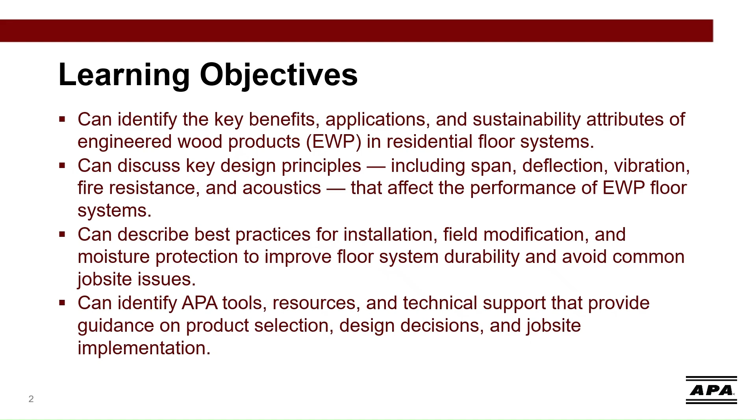All right, enough of the introductions. It's time to dig into our session today. But first, why do we use engineered wood products?

When it comes to floor systems, there are 4 main reasons designers and builders often choose engineered wood.

First, sustainability. These products make efficient use of wood fiber, utilizing a naturally renewable resource and maximizing yield from every log. Second, predictability. They're manufactured to tight tolerances, so performance is consistent and reliable.

Third, performance. Longer spans, flatter floors, and greater design flexibility give builders and design professionals confidence in the finished structure. And finally, waste reduction. Precision manufacturing and design efficiency help minimize job site waste, saving both material and labor as well as disposal costs. Together, these 4 benefits explain why engineered wood continues to be a go-to choice across the industry.

So we know why they're a good choice, but what types of products are we talking about here exactly? Before we get into design principles and best practices, let's quickly cover some product basics for the following list of engineered wood products that are typically used in, but not limited to, floor system design and construction.

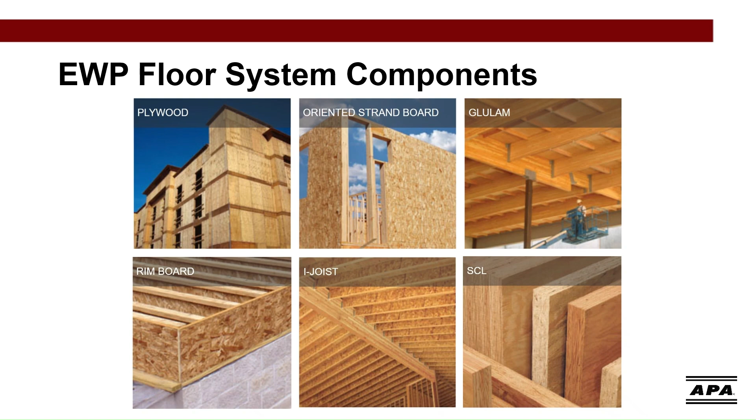We'll begin with structural composite lumber, or SCL. Compared to typical dimension lumber products, these products outperform when either face or edge loaded. The superior performance results from manufacturing processes that align the wood grain, eliminate knots and imperfections, and use dried, layered construction to provide dimensional stability and prevent bowing or twisting. The strength properties of these products are published on a proprietary basis by the individual manufacturer and recognized in their product evaluation reports.

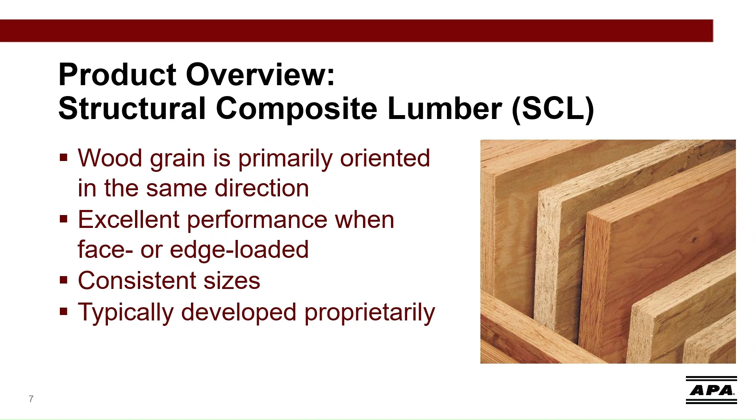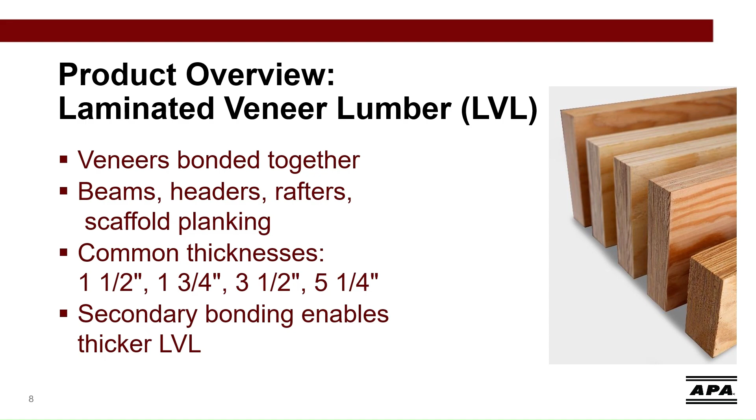The most widely used member of the SCL family is laminated veneer lumber, or LVL. It uses specially selected ultrasonically graded kiln-dried veneers and orients those veneers with the grain running lengthwise. In addition, the veneers are lap joined to create long lengths. LVL is commonly used for beams, headers, rafters, scaffold plank, I-joist flanges, and studs.

Parallel strand lumber, or PSL, is manufactured from veneers that are clipped into long strands and bonded together in a parallel formation. Similar to LVL, the grain runs in the direction of the length of the beam member to maximize bending strength. The strands are cut into lengths around 300 times their thickness, or approximately 1/8 of an inch thick by 1 inch wide, and up to 3 to 4 feet in length. This product is commonly used in headers, beams, and columns, and currently is proprietary to one manufacturer.

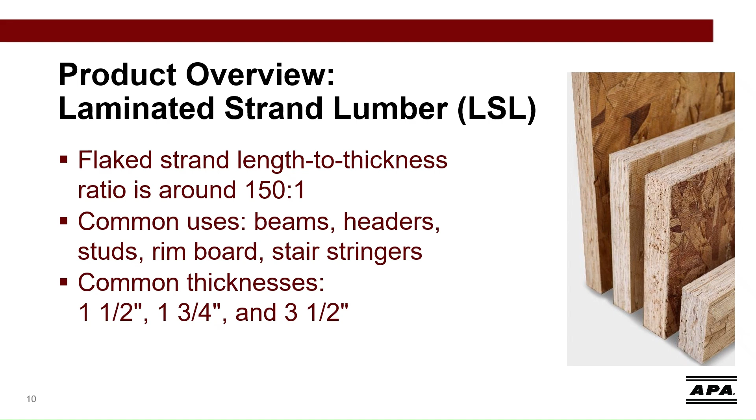LSL, or laminated strand lumber, is another popular member of the SCL family and is used primarily for beams, headers, studs, rim boards, and stair stringers. Unlike PSL, the strands are not cut from veneers. Instead, this product is typically made from smaller diameter trees consisting of a mix of hardwoods like harvested aspen, poplar, and maple, and the logs are stranded instead of planed into veneers. The length to thickness ratio is around 150 to 1, so strands are typically 1/8 of an inch thick by 1 inch wide and up to 12 inches in length.

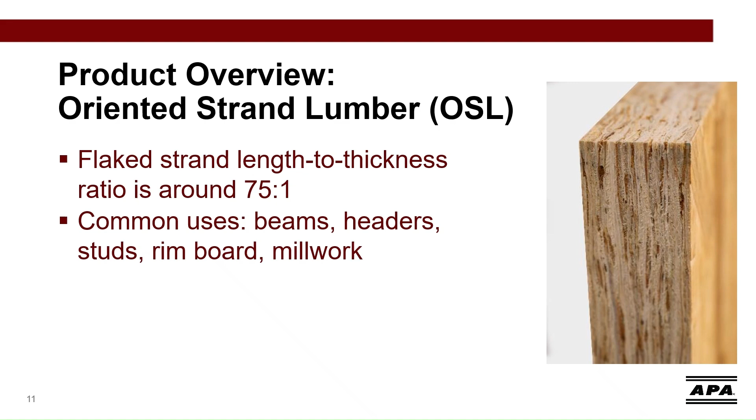And finally, OSL, or oriented strand lumber. It's another member of the SCL family, commonly used for beams, headers, studs, rim board, and millwork. Similar to LSL, the strands are harvested from logs instead of veneers. However, OSL strands are a little smaller than their LSL cousin. The length to thickness ratio is around 75 to 1, so strands are typically 1/8 of an inch thick by 1 inch wide and between 6 to 7 inches in length.

Another popular engineered wood product used in floor systems is glulam. This consists of wood laminations bonded together with the wood grain running parallel to the length of the member. Although they're available in nearly any depth and are only limited in length by manufacturing and transportation restrictions, glulam beams carried by local dealers usually don't exceed around 18 inches in depth.

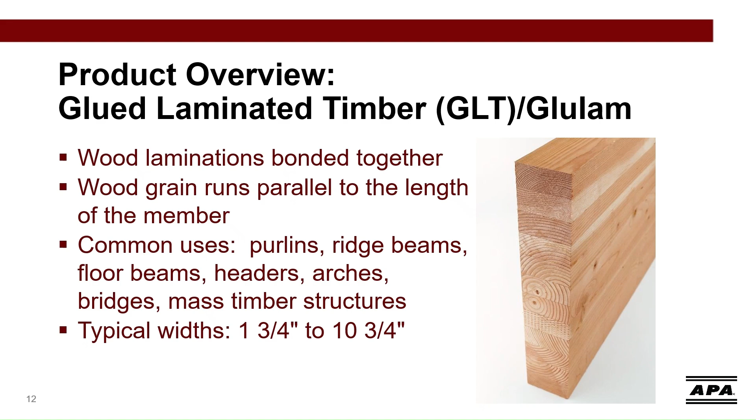These beams are commonly used as roof purlins, ridge beams, floor beams, headers, and columns. The typical width of a glulam can range from 1 3/4 inches to 10 3/4 inches, and they're commonly manufactured from southern pine or Douglas fir.

Let's look at SCL, glulam, and select structural lumber and compare the strength properties that control beam design, such as the allowable bending stress and the modulus of elasticity, which relates to the stiffness of the material or the ability to resist deflection. Looking at this table, we can group these materials into 3 categories based on their stiffness: low, mid, and high.

Note that both LVL and glulam offer products that fit into all categories, where LSL and dimension lumber fall within the low to medium strength range. In addition to LVL and glulam, PSL may also be produced with properties that fall within the high strength range.

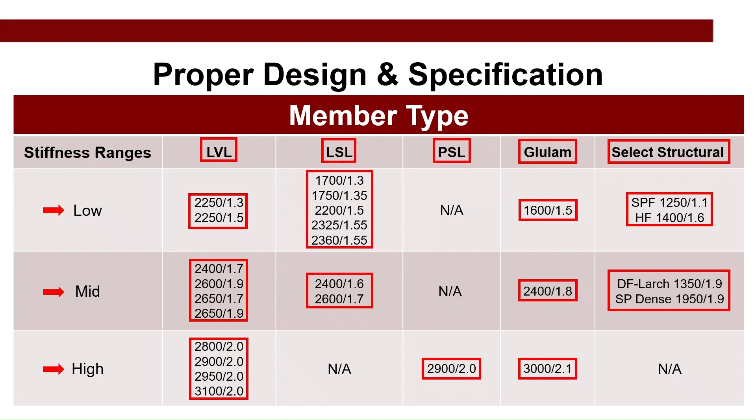When it comes to sizing the member, each individual manufacturer of SCL will have specifier guides, which include load tables for their products based on design properties published in product evaluation reports. These are typically located on the manufacturer website. For Glulam members, you may also reference our S475 design guide, which contains design tables for roof and floor applications.

With these tables, both a live and total load, including dead load, PLF, would be determined based on a tributary width, which could include multiple floors and partition loads if appropriate. The designer can then select an appropriate beam by looking up the span to determine which beam works best for the live and total load PLF, determined using the appropriate load duration factors, whether the beam is in a floor or roof application.

Additionally, Glulam and SCL beams can be sized using manufacturer or third-party software. There are many third-party software available, and a sampling of those is shown here. A list of standard Glulam layups with their associated design values are typically provided for selection directly in the software. For SCL, you may need to manually enter the design values for the intended product, or be very careful about the product you're specifying.

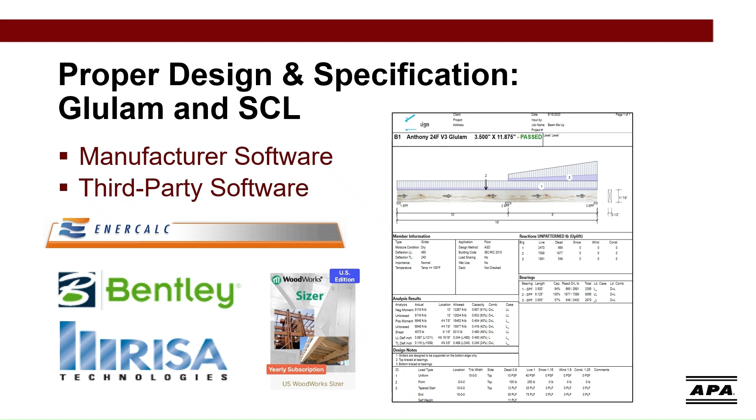Additional considerations for designers include product availability, available software or literature tools that is designed, affordability, as well as whether the members are proprietary or non-proprietary.

Proprietary products typically have specific design values and limitations unique to the manufacturer. Because of this, it may require design time when a substitution is requested, and reference code reports will need to be updated with code changes. Examples of proprietary products include LVL, LSL, OSL, and PSL.

Non-proprietary products are manufactured to meet standardized design values provided in a performance standard and code reference design guides. This means that the contractor may choose from a variety of available manufacturer products that meet the reference product standard and strength. Examples of non-proprietary products are dimension lumber and Glulam beams.

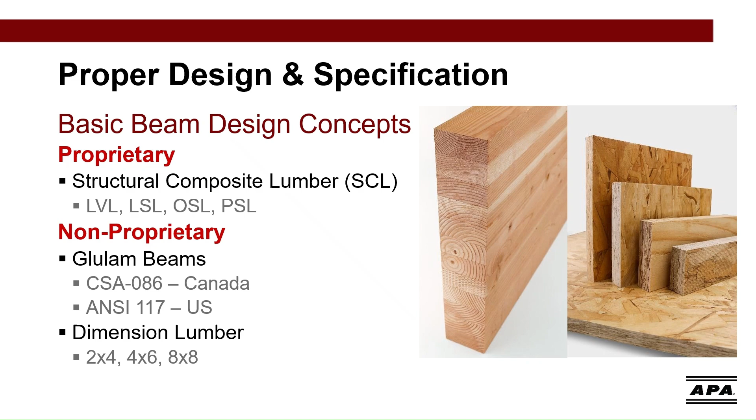I-joists are manufactured in 5 standard depths, including 9.5, 11 7/8, 14, 16, and 18 inches. Similar to SCL products, I-joists are proprietary, so design values and limitations must be obtained from their respective manufacturer. Different manufacturers may utilize different flange materials of various widths and thicknesses. Each manufacturer typically has their own proprietary series numbers that indicate relative capacity of the I-joist. Typically, for a given I-joist depth, higher series numbers indicate larger capacities achieved through larger flanges.

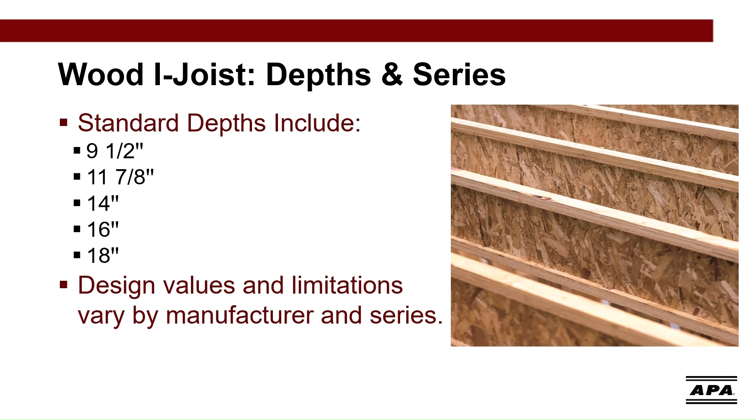They are also based on a set of specific parameters outlined in the table footnotes. These include, but are not limited to, live and dead loading that's being assumed, live and total load deflection criteria, floor sheathing performance category and span rating, ceiling or no ceiling, etc. And these may vary from table to table and for each individual manufacturer.

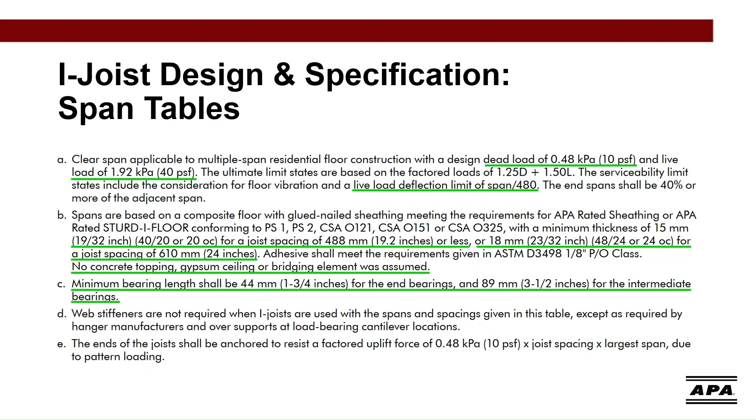Remember that span tables are more conservative than design software, so in some cases, the software may pass a member that appears to fail in the span tables. If an I-joist is specified in an application that meets the design criteria outlined in the span table footnotes and the specified span, it does not require an engineer seal. A seal is only required for point-loaded I-joists or if any of the design parameters are different from those specified in the manufacturer's span table.

Floor layouts produced in design software allow design professionals to change these parameters to suit the specific project needs. There should be a layout for each floor and/or roof, and the design properties should be outlined for each. Additional loading for stairs, tiled areas, kitchen islands, etc. should also be included for each level. Material lists should also be provided for each level, including a hanger list, which will usually specify the fasteners required.

Let's shift our focus to wood structural panels, including OSB and plywood, which are manufactured using wood strands for OSB or veneers for plywood. For plywood panels, the outer veneers are referred to as the face or back plies. The inner plies can be referred to as the core or cross band plies or center ply. The orientation of the strength axis or grain is very important in the fabrication of plywood to ensure dimensional stability and structural properties. The direction of the grain is oriented in perpendicular directions as the panel is laid up.

All of the veneers are bonded together with a waterproof adhesive under heat and pressure. This creates a panel where the veneers work together to form an integral unit. As with plywood, OSB is manufactured with layers with the grain of the strands running in perpendicular orientation to the adjacent layer to ensure dimensional stability and optimal structural properties. OSB is commonly produced in 3 or 4 layers depending on the manufacturing process used at each mill.

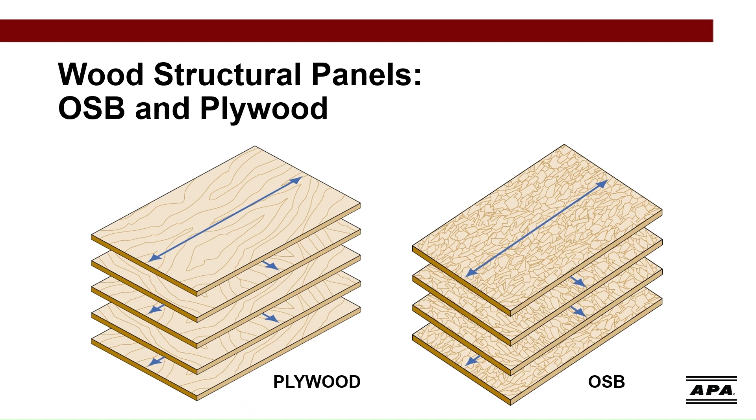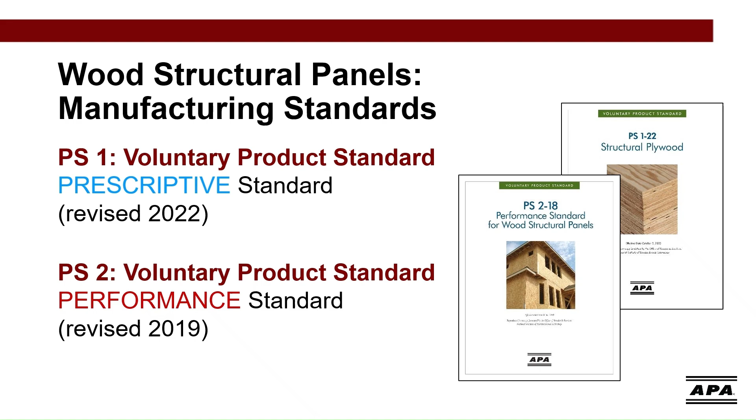U.S. building codes require that structural panels for applications in the U.S. comply with either PS1 or PS2 voluntary product standards developed under procedures published by the U.S. Department of Commerce. PS1 establishes requirements for structural plywood and is primarily prescriptive. PS2 establishes requirements for structural wood-based panels, which include oriented strand board and plywood, and is a performance-based standard.

Wood structural panels for use in Canada must meet the following standards: CSA O121 for Douglas fir plywood, O151 for Canadian softwood plywood, O153 for poplar plywood, and O325 for construction sheathing, which includes oriented strand board.

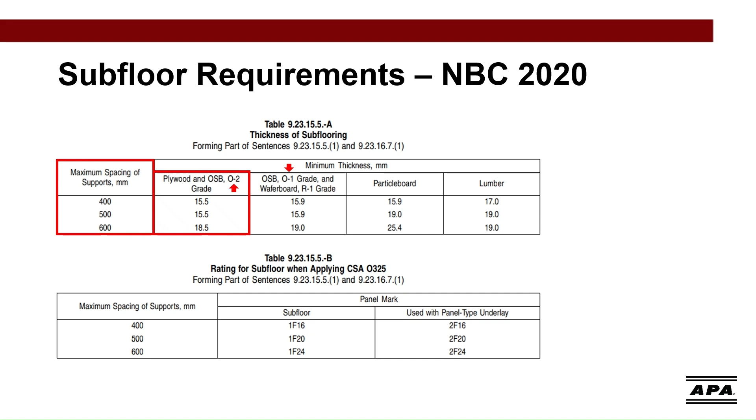And subfloor panels manufactured to meet CSA O325 must conform to Table 9.23.15.5B, as shown here.

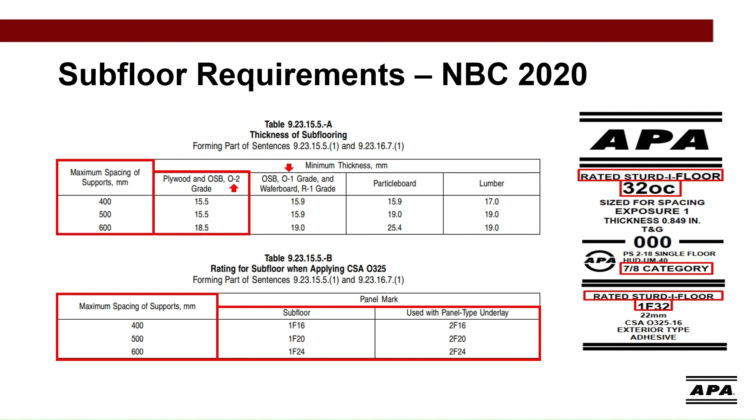The most common APA-rated subfloor trademarks can be seen here, starting off with a 19/32 or 5/8 category subfloor panel. Then we have a 23/32 or 3/4 category, and finally 7/8 category.

In the US, roof and subfloor sheathing requirements can be found in Table R503.2.1.1 as shown here.

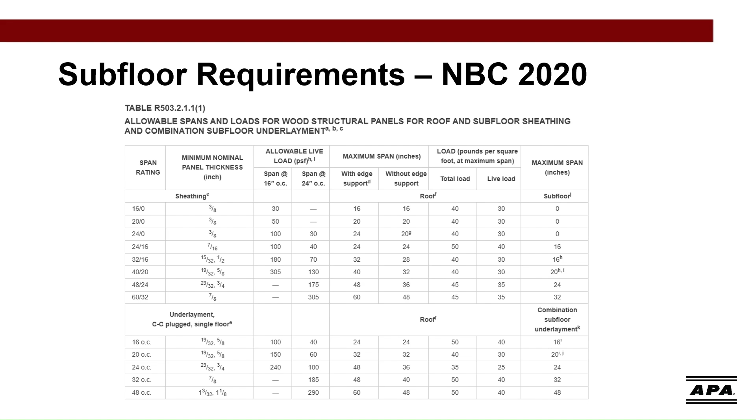All right, let's dig into some design tips and best practices. First step to a quality performing floor is to account for variables that will impact floor system performance.

This includes the type of finished floor product being used. Is it hardwood, ceramic, marble, LVT? The use of ceramic and marble flooring will require additional loading where installed, and each will have specific guidelines and requirements regarding deflection of the floor system and smoothness of the subfloor deck.

What about kitchen islands, countertops, stone-clad fireplaces, and freestanding tubs, along with any mechanical rooms or special use areas? Many designers will use an additional 50 PSF dead load in these areas or align with manufacturer specifications.

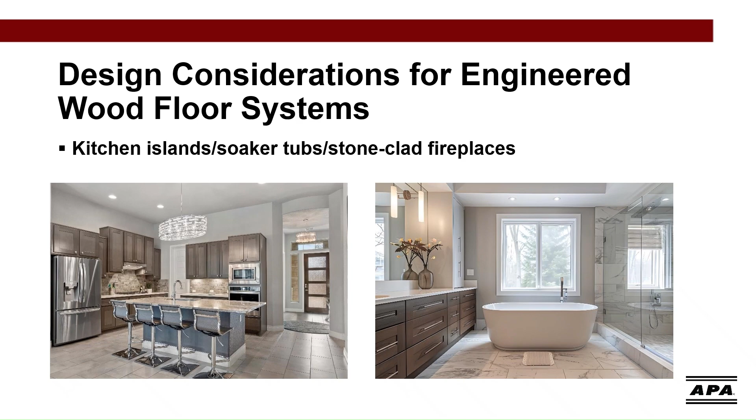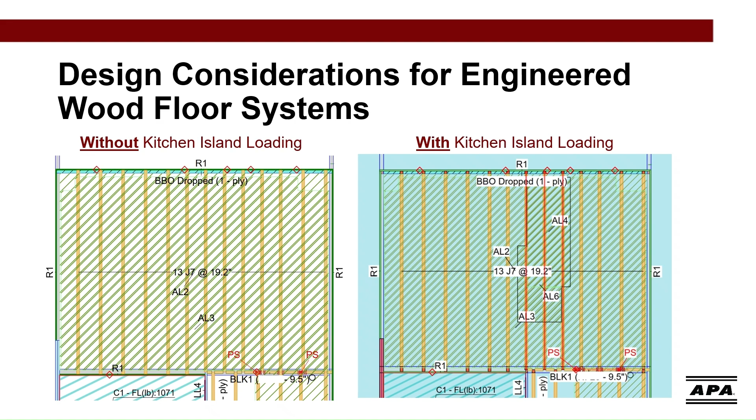Here's an example where the joists work just fine. However, when the kitchen island load is added, the I-joists supporting it fail. This is a perfect example of a floor that will likely experience unwanted deflection and vibration that may lead to cracked tiles in the kitchen area over time.

When designed with the proper loading condition, the floor looks like this, where the joists supporting the kitchen island have been increased to a higher series, capable of handling the additional load. If sticking to the same series is preferred, other options include tightening up the joist on center spacing or doubling the joists in this area.

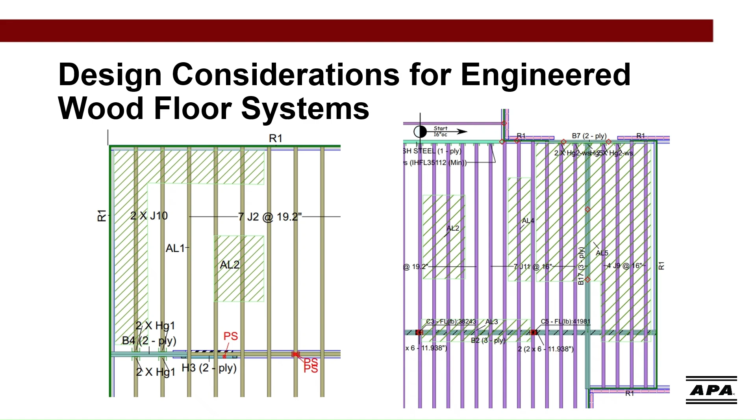Another often overlooked vulnerability is kitchen countertop spaces that run parallel to long spanning joists, as shown here in these examples. So it's not just the kitchen islands, but these other areas. They have ovens, fridges, microwaves. They've got the cabinets and all the dishes and other heavy content inside them. A lot of these countertop areas have granite or quartz on top as well. Design professionals that provide additional loads in these areas can help alleviate floor performance related issues in the future.

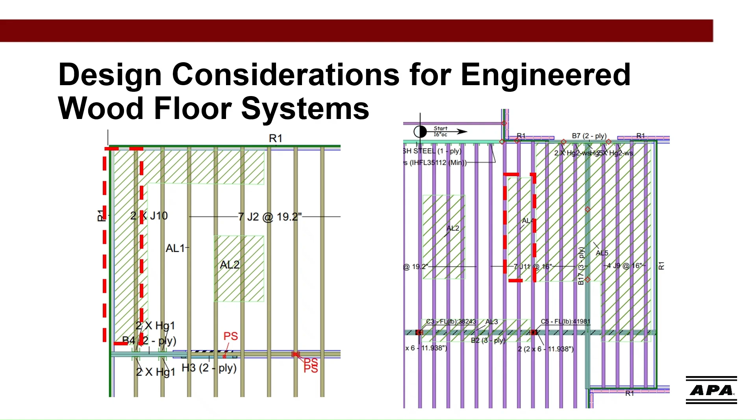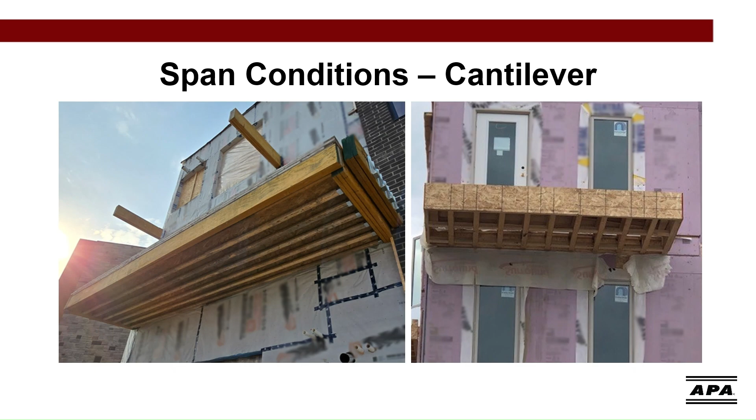Here's an example of a cantilever span condition where the joist or beam cantilevers out over the second support. In this case, the cantilevered members are supporting exterior balconies, but they're often also used to support building offsets. This is what the detail looks like in plan view. Full depth blocking between each cantilevered joist along the support nearest the cantilevered section is critical, as shown here.

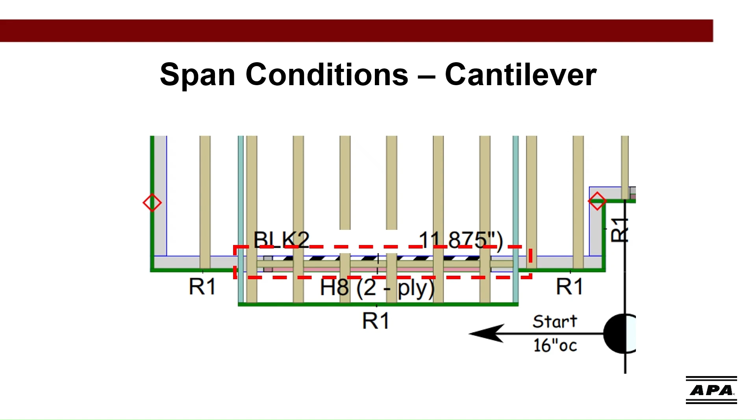When the designer uses a cantilever, as shown here, the hangers along the stair header can be removed, and a simple I-joist to rim board connection detail is used. Blocking is required between the I-joist along the support nearest the cantilever.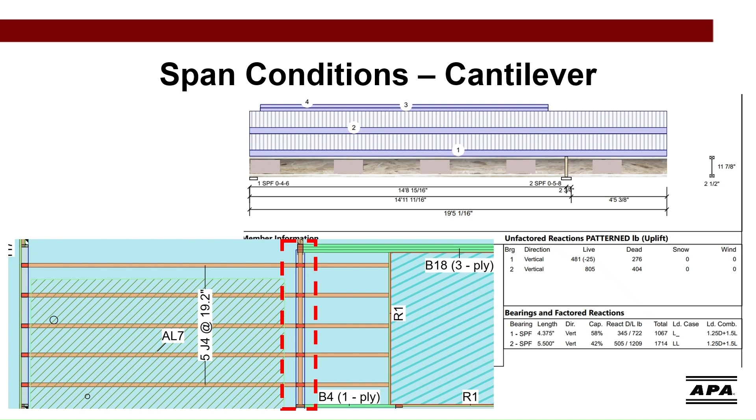APA recommends keeping the cantilevered I-joist portion 1/4 of the back span or 4 feet, whichever is less. While APA details can be used for all I-joist products, most manufacturers have additional details specific to their products. For instance, some allow for a cantilever up to 1/3 the back span. We have many generic cantilever details that can be found in our Z725 publication for those interested.

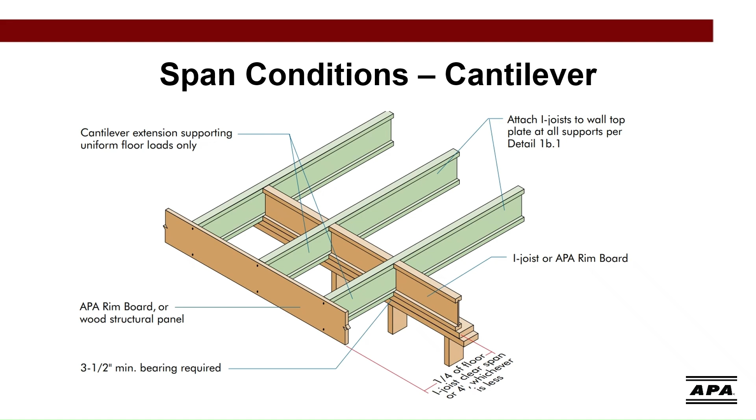So what's better, a simple span or a continuous span? Well, from a performance perspective, a continuously spanning joist will feel stiffer and in many cases span further.

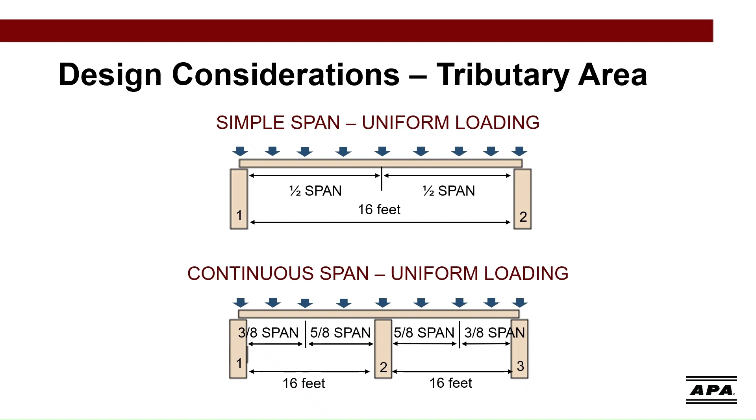One important consideration for span conditions is load distribution. In a simple span condition, half of the uniform load is distributed to one support and half to the other. Pretty simple. Now for continuous spans, the uniform load is distributed a little bit differently as shown here. The middle support ends up taking just a little bit more than half of the load from either span. This also means the continuous member will experience a slightly higher shear stress than the simple span members, but that's not typically the limiting capacity for longer spans.

Here we see an example of a floor over a garage designed two separate ways. On the left, a dropped glulam beam is used to break up the 26-foot clear span, and the floor can be framed using low series 9.5-inch deep I-joist spaced 19.2 inches on center, running continuous over that drop beam. On the right, we have no drop beam in the middle, and the joists are spanning the full 26-foot clear span. In this scenario, the floor is framed with 2-ply high series 16-inch deep I-joist spaced 16 inches on center. So this example shows the value of a continuous span.

On the left, we can get a 9.5-inch floor system to work at 19.2, but it also highlights the capability of I-joists on the right, that they can actually span that full 26-foot clear span.

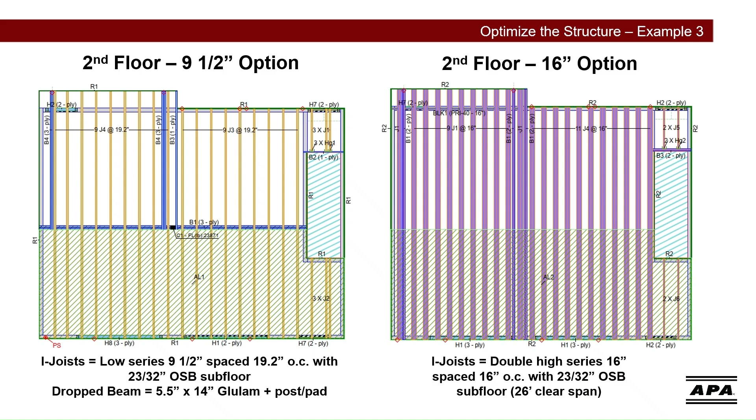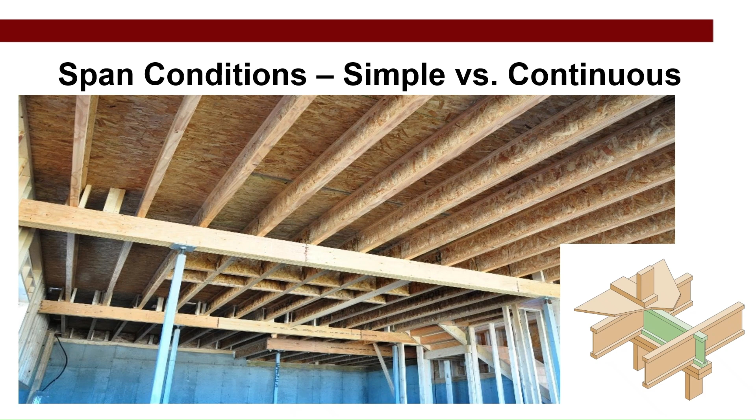Back to this photo. Another thing to consider when selecting span conditions is that I-joists require lateral support on each end. In this case, the simple span joists in the back should have panel blocking installed between them along this support. For continuous spans, panel blocking is not required as long as there is no load-bearing walls above. If the structure is located in a high seismic zone, additional blocking may be required. Any blocking or squash blocking below point loads should match the cross-sectional dimensions of the post above.

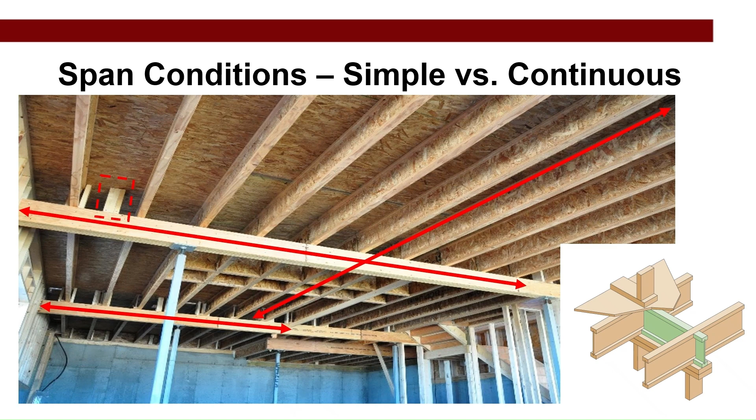Here are a few examples of simple spans which require blocking. Imagine how difficult it will be to place blocking between each joist in these situations. This is where the advantages of using a continuous span can help not only improve the performance and efficiency of the floor system, but also alleviate laborious and almost impossible framing details as we see here.

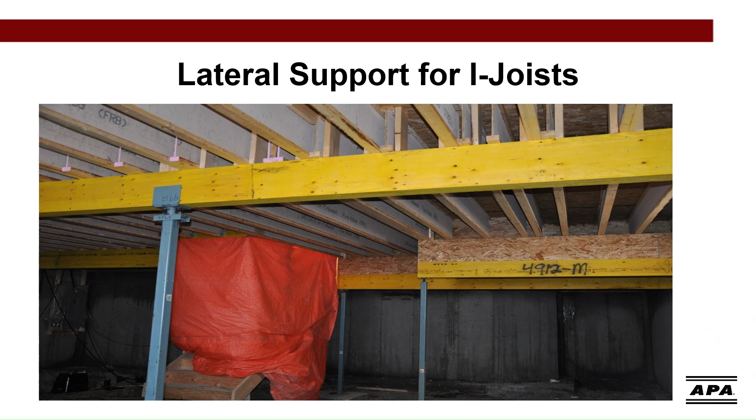Imagine being the HVAC installer and having to run through this point. We're thinking double bulkhead. Even worse, when it can be installed after all that work that someone paid for to install the blocking, HVAC and plumbing trades come in and they have their way with it. As you can see in these examples, they just knock them out.

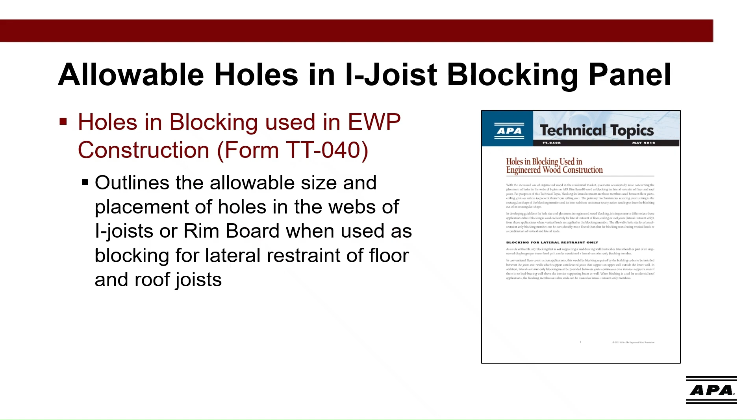As a general rule of thumb, any blocking that's not supporting a load-bearing wall or that is required as part of engineering design for a diaphragm can be considered lateral restraint-only blocking, and the allowable holes described in this publication can be applied.

Here we see the allowable hole sizes as listed in Table 1. Basically, the maximum allowable hole size is 2/3 of the lesser dimension of blocking depth or length, assuming that the blocking member is longer than its height or depth.

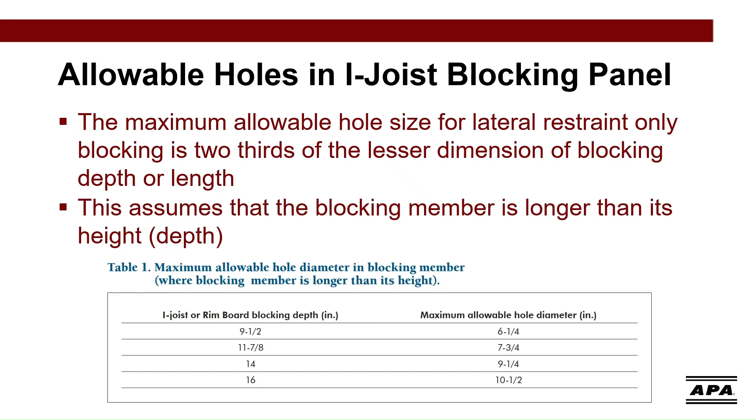This tends to happen for mid-span blocking as well. The HVAC installation in this particular model was very streamlined, very well organized. Floor system design called for the use of mid-span blocking in a location where the joists were spanning close to 18-foot clear span. And as you can see, most of this blocking has been removed to accommodate the HVAC system components. Now, this is a great example, a reason to design the floor system such that mid-span blocking is not required, so you can avoid these situations.

The floor system performance in this area may be unsatisfactory to the homeowner. Unfortunately, this area of the floor system supports the mudroom, which has ceramic tile. Without the mid-span blocking installed properly, this section of the floor may experience excessive deflection, vibration, which may lead to cracks in the tile flooring over time.

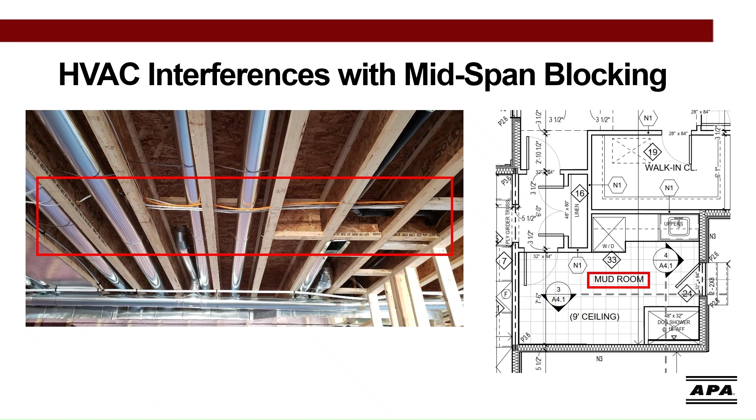Consistency of the floor system layout or design layout is another discussion worth having. Consider this basic floor layout with various joist spacings and span lengths. It's important to note that floor areas with different spans and framing conditions can result in areas of the floor performing or feeling different than others. In this example, we see an area with short joist spans adjacent to an area with long joist spans, right next to an area with wider joist spacing, and another area where the joist direction changes altogether.

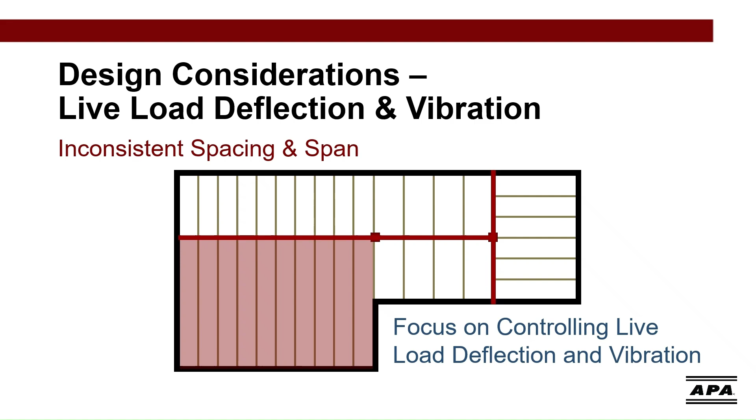Two very impactful design parameters that will determine the overall performance of the floor system: live load deflection criteria and vibration control. When it comes to live load deflection, the code minimum is L/360, but L/480 is generally recommended. But what the heck does L/ mean anyways? Well, L represents the joist span in inches. So let's say our largest joist span is 18 feet. Convert to inches, we multiply by 12, we've got a total of 216 inches.

As you can see, if we were to use L/360 live load deflection, any joist deflecting 0.6 inches or less would pass design. However, based on my experience, any live load deflection over ½ inch should be raising red flags to the designer. By simply increasing the deflection criteria to L/480 live load, we reduce the allowable deflection in the joist, thus increasing the performance of the floor system. To select the best deflection criteria for your project, simply determine the largest span and run this equation until the allowable deflection meets your needs. Just keep it under ½ inch. Another important consideration is your intended finished flooring material, as these can often dictate your limits.

Another key element to floor performance, vibration control. In the US, floor vibration is not explicitly regulated in the model building codes, but in Canada it is, and it has been since 1990. CSA O86-19 section 5.4.5.2 lists acceptable methods for determining vibration. Most design software will include vibration analysis when Canadian building codes are selected. You'll find that in most cases, vibration governs. We'll get into some examples in the coming slides.

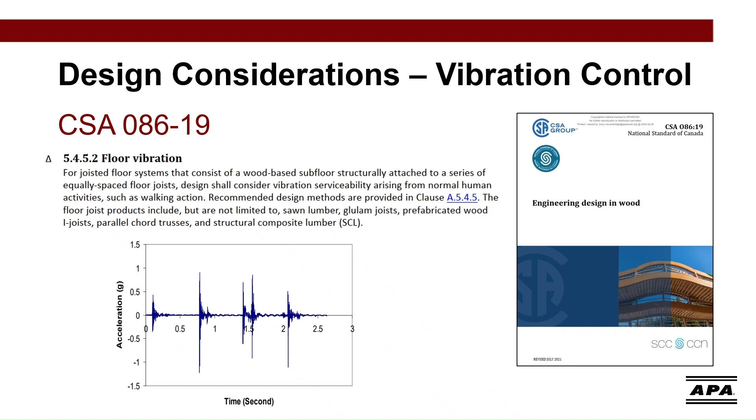I have heard that vibration is something that is currently being considered for inclusion in future US building codes. APA has also studied floor vibration, and we have the following technical notes for anyone that wishes to dive a little bit deeper on this subject.

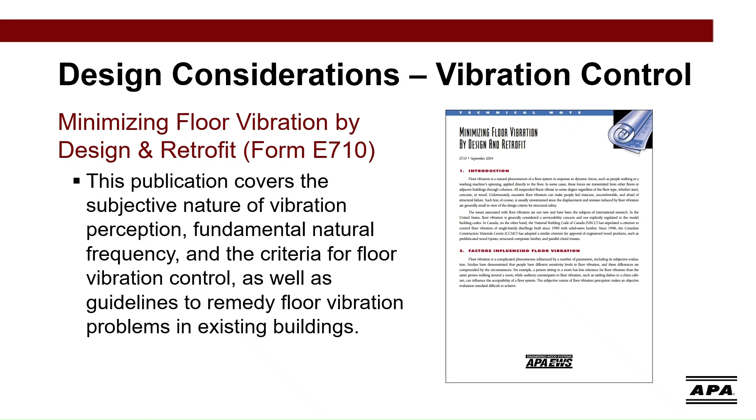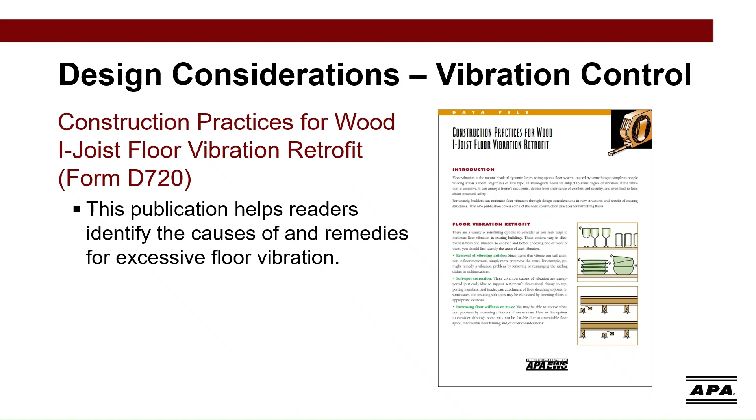Along with this D720 publication, both of these publications discuss causes and potential remedies for excessive floor vibration, but it's best to account for it in the design stages. Using this information, design professionals can ensure that the floor joists spanning over area B will feel stiff, and the difference between them and those in area A won't be as noticeable.

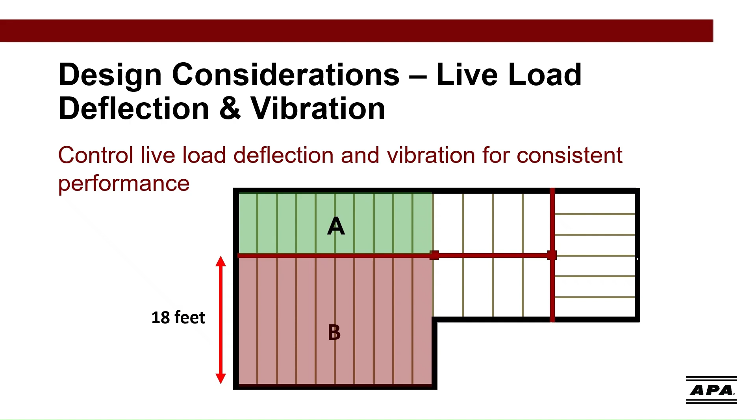Here's an example where the joists under the kitchen, mudroom, and pantry areas pass in the design software, but upon closer inspection, we find that they're maxed out when it comes to vibration at 100%. Design professionals should pay closer attention to floor performance in areas that are likely to see more frequent heavy traffic, such as entryways, hallways, kitchens, family rooms, etc.

What are some possible solutions? The builder or design professional can use a higher series I-joist, a thicker subfloor deck, can utilize mid-span blocking, but can be considerate of HVAC. They could install a directly applied ceiling if there isn't one, or maybe tighten up the on-center spacing of the joists in these areas.

Here's another example. The joists under the primary bedroom pass design, but when the member report is reviewed, we'll note 95% vibration, and we're getting close to that half inch live load deflection.

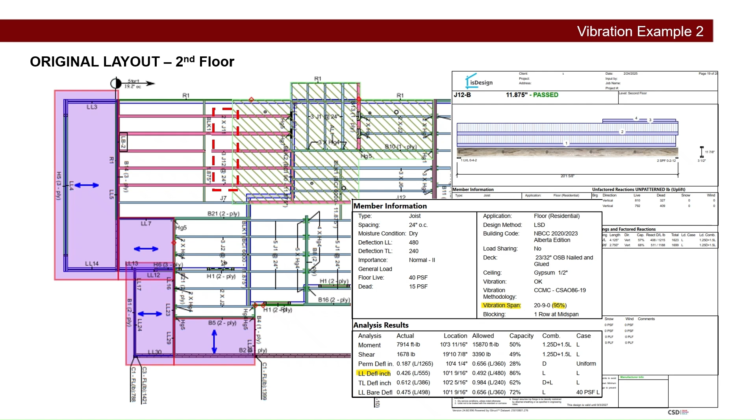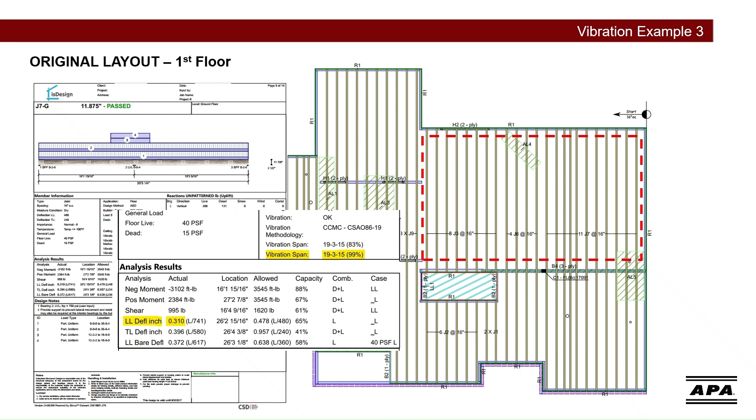Most software allow the user to quickly pull up member reports for a quick live load deflection and vibration check, so this doesn't take very long to do.

Revised layout looks like this, where a higher series I-joist was used to maintain an acceptable level of performance from the builder's perspective.

A row of mid-span blocking was added in the simple span area to maintain a similar level of performance to the other joists. You can see that vibration at around 86 to 90% is where it is now for the whole floor.

Through APA's complimentary consulting services, the problem was identified and has since been resolved on a very popular model for this builder.

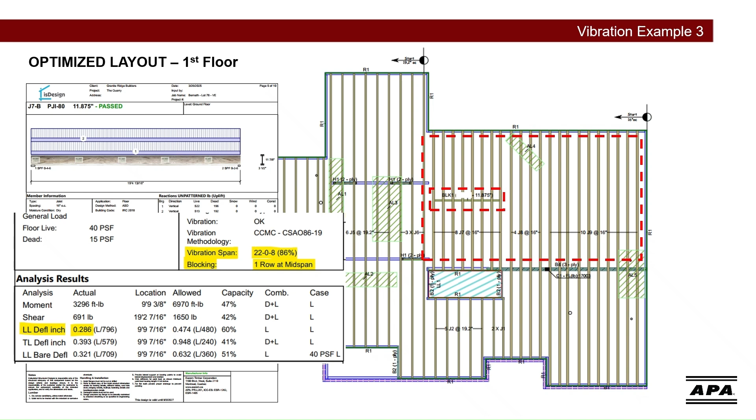Here we see the recommended connection detail for I-joist blocking panels to I-joists, where a piece of 2x lumber is used to make the connection at the webs. This detail is also our starter joist detail for end walls.

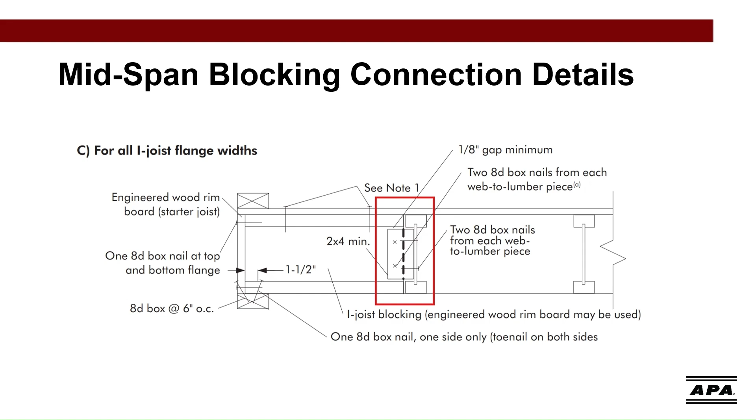Another important element in floor design is subfloor thickness and span ratings. Some of our members produce a 19/32 or 5/8 category subfloor panel with a span rating of 20 inch on center, meaning no supporting member can exceed 20 inches. Some also produce a thicker 23/32 or 3/4 subfloor panel with a span rating of 24 inch on center. And finally, some of our members also produce a 7/8 category subfloor panel.

However, be careful when specifying these panels because some come with a span rating of 32 and some come with a span rating of 24. For this reason, it's really important to reference the span rating of the panel in addition to the performance category. Thicker subfloor decks can help reduce vibration in the floor system.

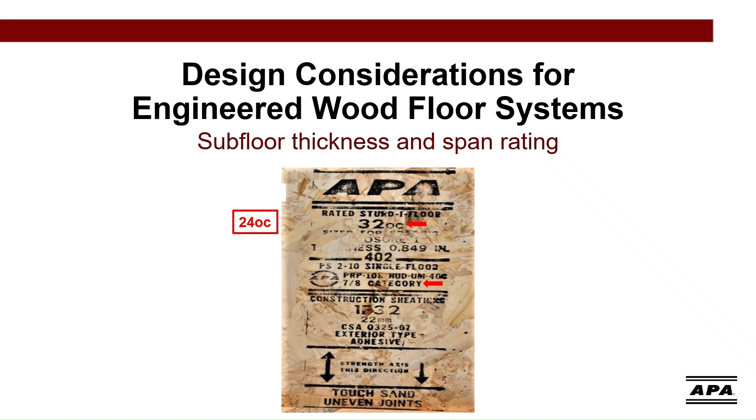If we look back at this example layout, we note that the joists in area C are at a wider on-center spacing than those in area A. We've got 24 on center and 16 on center. These two areas of the floor will perform slightly different, even though the joists are spanning the same distance.

In this situation, the span rating of the subfloor is going to play a significant role in the performance of the floor system here. Many design professionals find that it's best to step down the joist on-center spacing from the span rating of the panel. So, for example, if the panel has a span rating of 24, many designers will step down the spacing of the joist to 19.2. If the panel span rated for 20, many will step down to 16, etc.

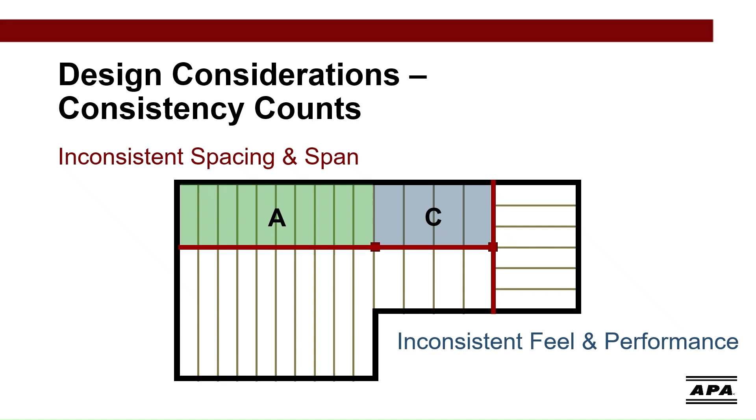What this does is it leaves a little wiggle room if any of those joists need to be shifted to avoid interferences from plumbing, HVAC, or even anchor bolts on sill plates.

This is why it's a good idea to leave a little wiggle room, as noted on the previous slide, so that the subfloor span rating is not exceeded.

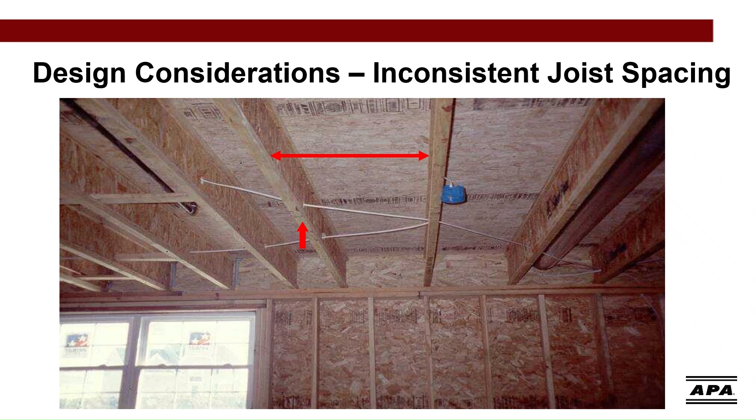When hardwood flooring is being used, design professionals should consider the following: The National Wood Flooring Association provides guidance on when to use an underlayment under hardwood flooring. This guide details a single layer system where the underlayment isn't required when the joist spacing is not at the maximum rated span of the subfloor panel.

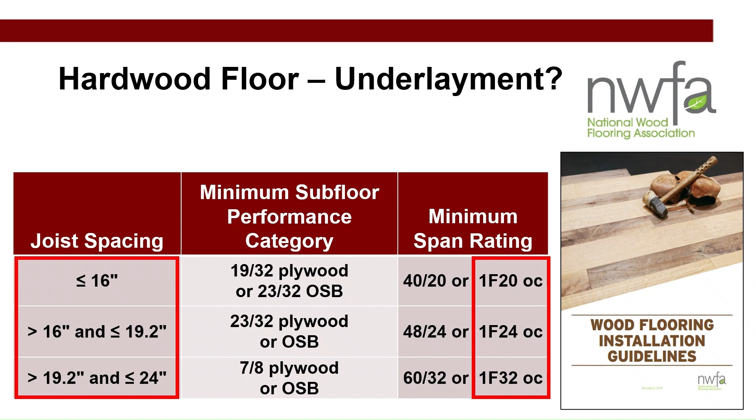APA recommends using subfloor adhesive in addition to fasteners to help create a solid bond between the subfloor and supporting members. Most span tables assume a glued and nailed subfloor. A reduction in spans is typically required if not gluing. These settings can be altered in most design software and should match what is being done out on site.

The advantage of a glued nailed floor system versus nailed only is the composite action of the panel with the supporting framing members. This composite action results in an increase in overall floor system stiffness, but not strength. Also, a glued nailed floor is less likely to squeak than a nailed only floor.

APA engineers advise that in a glued nailed floor with tongue and groove edges glued, 90% composite action can be achieved. In a glued floor where the tongue and groove edges are not glued, 45% composite action can be achieved. And in a nailed only floor, approximately 6% of fully composite action can be achieved. However, in a nailed only floor, this small increase typically diminishes as the wood framing seasons or is subjected to in-service humidity changes. We have the following technical topic, TT036, that provides a design example.

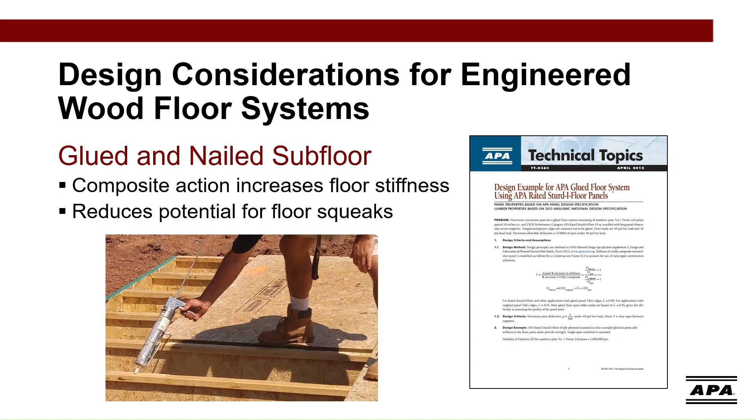For this to work, the framer must ensure that the panels are installed properly. This includes laying down only enough adhesive for a few panels at a time to ensure it does not cure before they're fastened, which can reduce the benefits of composite action.

APA's recommended fastener spacing for wood structural panels in floor applications is 6 inches on center along supported ends and edges, and 12 inches on center in the field of the panel. It's also critical to keep these fasteners tight to the perimeter, so 3/8 of an inch in from those ends, edges, and corners. These recommendations are often overlooked at the job site, as you can see in these examples.

Again, we want to see them 6 inches on center along supported ends and edges, 12 inches on center in the field of the panel, not 21. And again, we really importantly want to see them tight to the perimeter, not 3 inches away, 3/8 of an inch away.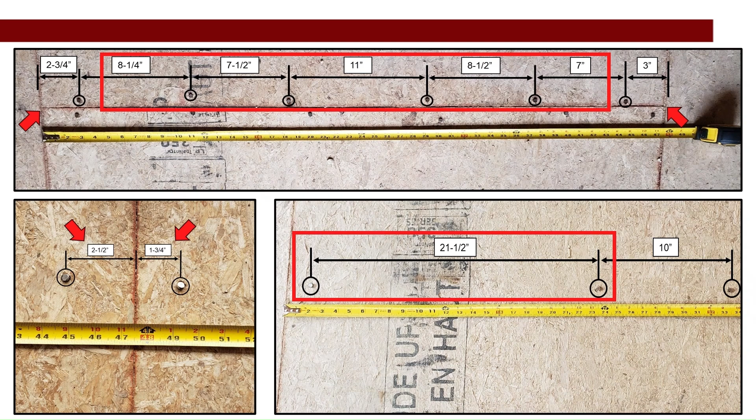It's also important that fasteners are driven into framing members. When they miss, like we see in these examples, it's impossible for the panel to be fully engaged with the supporting member. In floor systems, this can lead to adhesive curing, leaving gaps between the sheathing panel and the framing member, causing unevenness in the floor system, and can contribute to crunching sounds when walked on. It's the responsibility of the framer and building inspector to ensure that all fasteners are fully engaged with the supporting members and that the correct fastener type and length is being used.

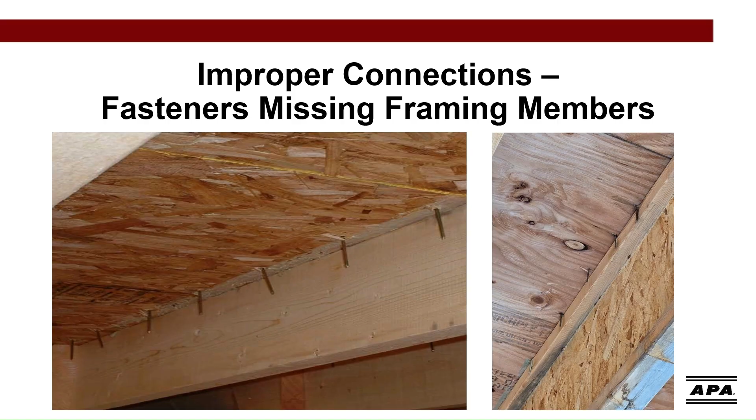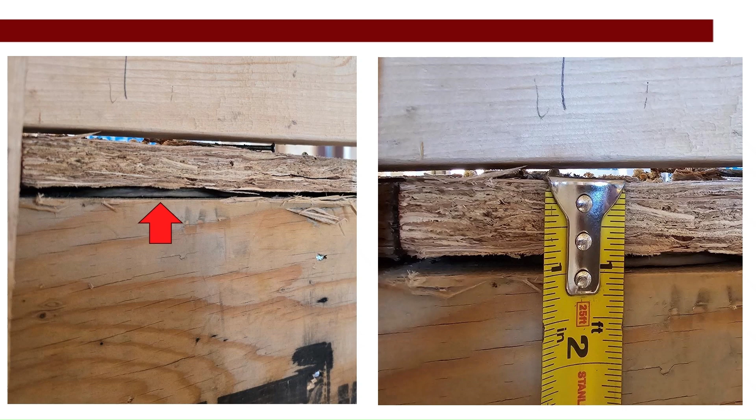Here we see an example of a gap that can occur as mentioned on the previous slide. When fasteners miss framing members or are not in the correct location, or when adhesive is applied and left to sit before the panel is installed, it can cure, causing gaps that contribute to an uneven floor surface, and crackling or crunching sounds can be heard when the panel is walked on. This is a warranty manager's nightmare, or at least one of them.

For additional information regarding panel subflooring and underlayment, I recommend the following APA publication, which is available on our website for free download. All of the information in our R300 publication is generic across the industry.

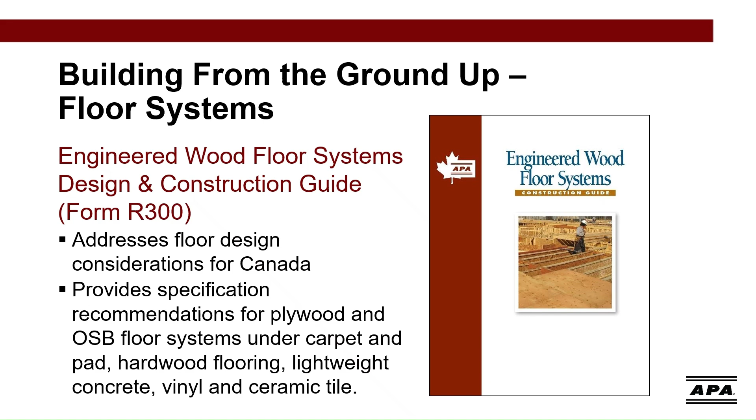Floors over garage areas may not have a directly applied ceiling if that ceiling is dropped. So just be aware of these scenarios, as it could significantly impact the performance of the floor system. Make sure they're being designed correctly.

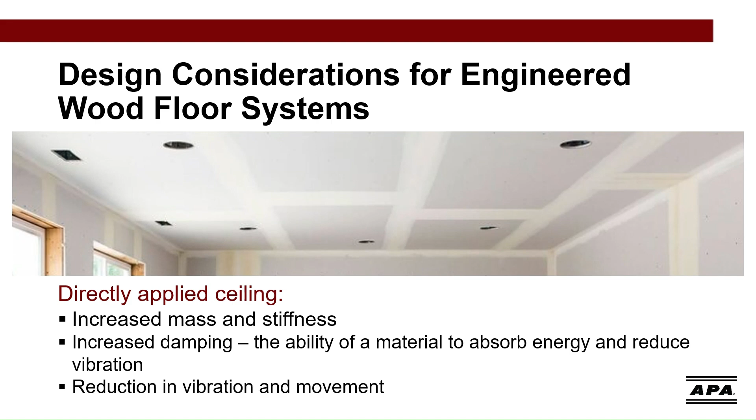For residential buildings with a basement, a directly applied ceiling will not only improve the performance of the ground floor system, which may allow for a lesser series joist or a wider on-center spacing, or both, but it will also satisfy the fire protective membrane requirements listed in the IRC. APA System Report SR 405 is intended to provide prescriptive fire assemblies for I-joist floor systems when IRC Section R302.13 requirements are adopted by the local jurisdiction, and is available to download from our website.

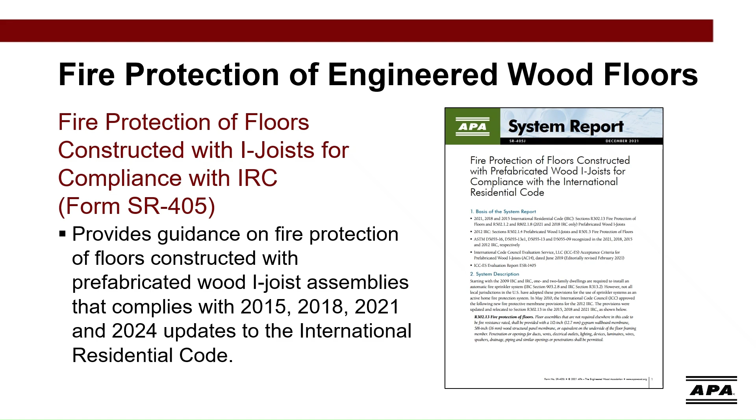When reevaluating the structural elements, it's important to identify point loads generated by girder trusses and flush or drop beams, and ensure they're not creating offset loads below which require additional support. We try as much as possible to align our point loads with bearings below. It's also critical to incorporate the HVAC system layout in the floor system design—there are many cases where you have a very efficient floor system layout, but it just doesn't work with the HVAC design. The two plans need to blend and work together.

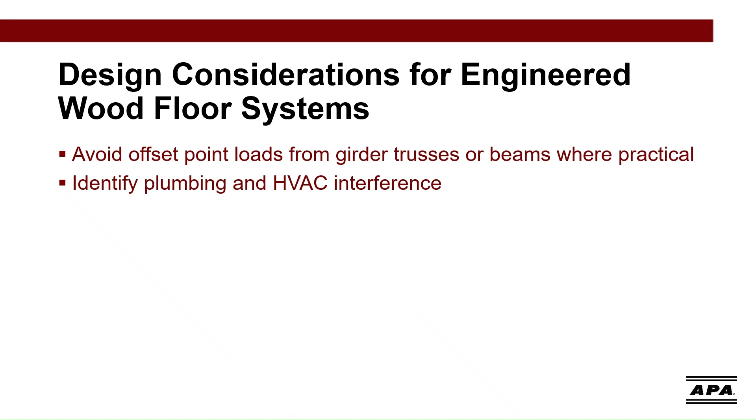EWPs and dimension lumber products don't work well together in flush conditions due to their different depths and different rates of shrinkage, which dimension lumber products are much more susceptible to. Another great tip: avoid changing joist direction as much as possible. Doing so has the potential to create humps in the floor system, and it creates interferences for flush HVAC systems, and this increases labor and waste.

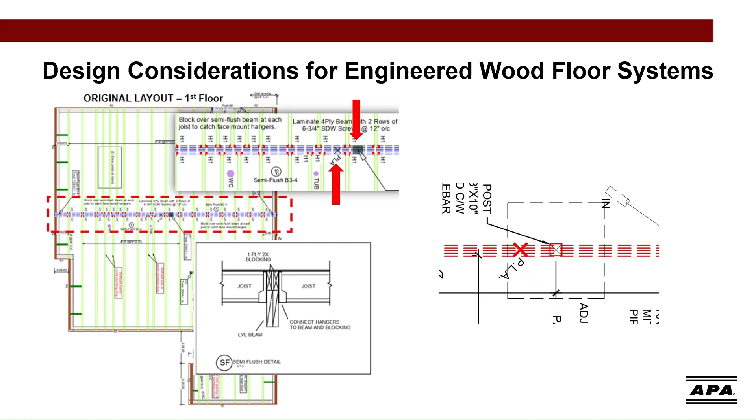The sooner along in the design process that you incorporate these variables and involve all members of the project team, the easier it will be to conduct an efficient analysis and ultimately select the best floor system design for you and your customer's needs and expectations.

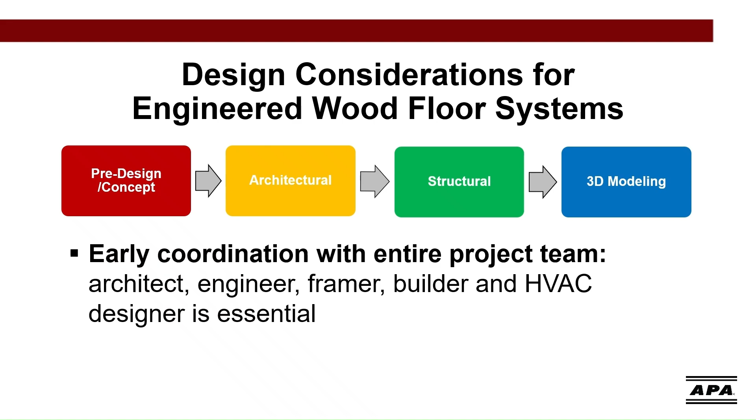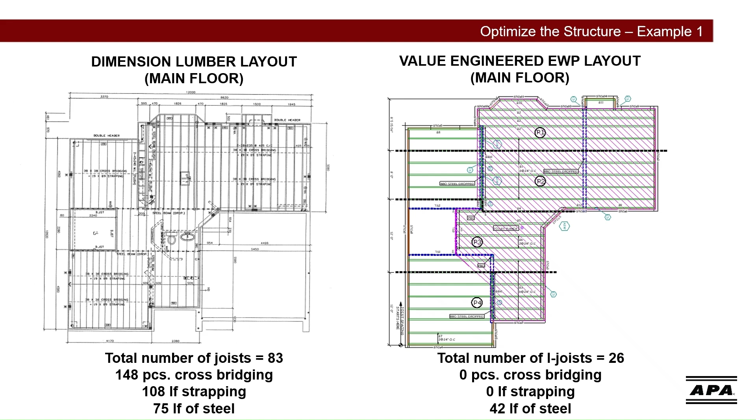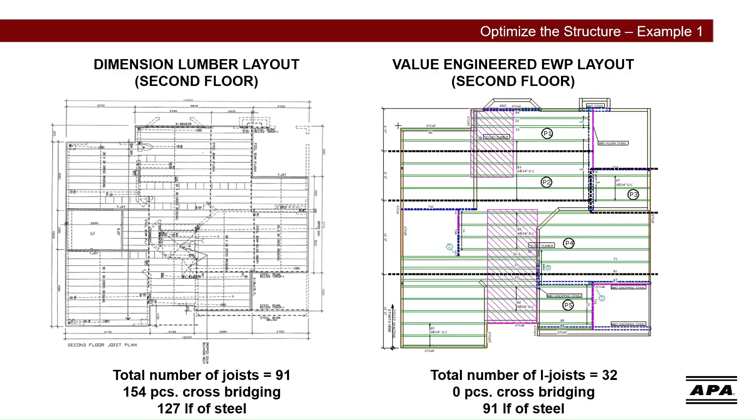Callbacks can quickly diminish any initial savings gained by not following some of the tips we've just covered. After working with many builders over my career, I can say it's just not worth it. Spending a little bit more time up front in the design stages and following through with on-site training for trades is a very smart investment.

I hope that you've all been able to take something useful away from this session today. Don't hesitate to reach out if you'd like to discuss any of this information in greater detail. APA is here to help.

When you do that, a little drop-down menu with many options will appear. A few I'd like to point out: the APA Webinars section, which contains a list of pre-recorded on-demand training sessions covering a wide variety of topics—I'm sure this one will be in there soon. Our CAD Details section contains an ever-growing selection of wood frame construction-related details, and you can download them in multiple formats. The publication category section contains many of the publications we referenced during this session, and as I said, many more. There's over 650 publications.